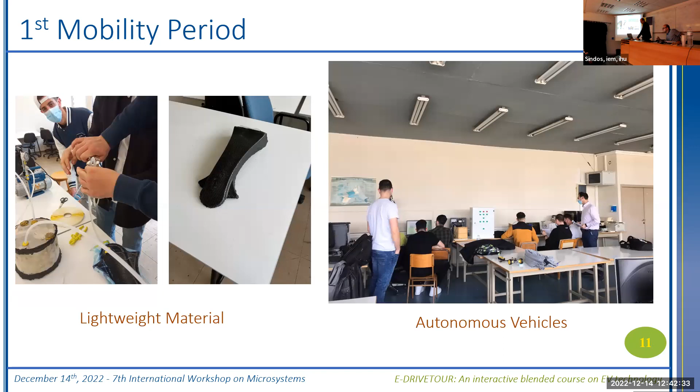Also, a few things about Greek language and culture, which was practiced in the city of Thessaloniki appropriately. Finally, during the last day, we had a real electric vehicle coming from the Center of Research and Technology in Greece, which the students investigated, served every part of it, and we had the last picture of the first mobility period. In the second mobility period, things were more or less the same.

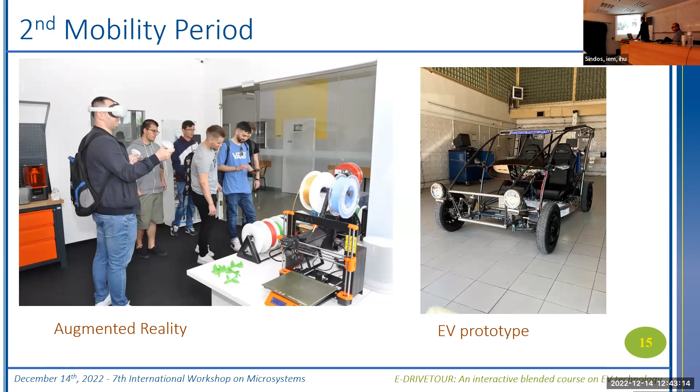We had the augmented reality lab. The students worked with an electric vehicle prototype, did their onboard diagnostics on a Toyota Yaris hybrid, and some cultural activities, which was part of the pleasure that always accompanies this mobility period.

During the third mobility period, the students were divided into 4 groups. One group came here to Thessaloniki to work with Interlink, the CERTH, and the International Hellenic University. Another group moved to EASY in Poland. A third group to E-PROIN in Salerno, Italy. And finally, a group of students to TRIGO, a group producing electric vehicle prototypes in Poland.

After all these procedures, we had the certification exams. They are divided into 3 parts. Each of these parts examines the knowledge of specific topics from the overall curriculum, and the final certification will be provided by ECQA, which is a certification provider company from Austria.

In the frame of the project, various materials have been produced, like website, social media, the e-learning platform, some technical publications, participation in forums, events, workshops like this one, and promotional material.

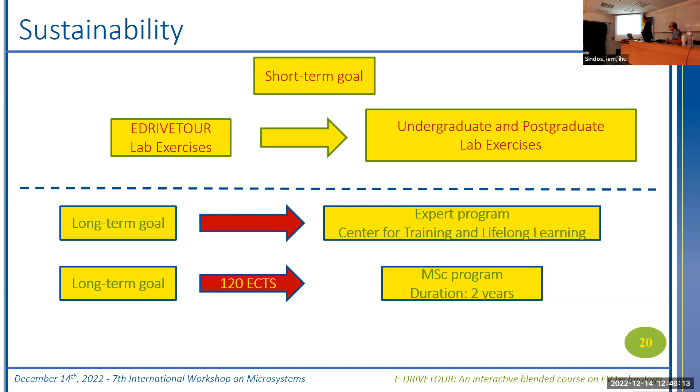That's all. Thank you very much.

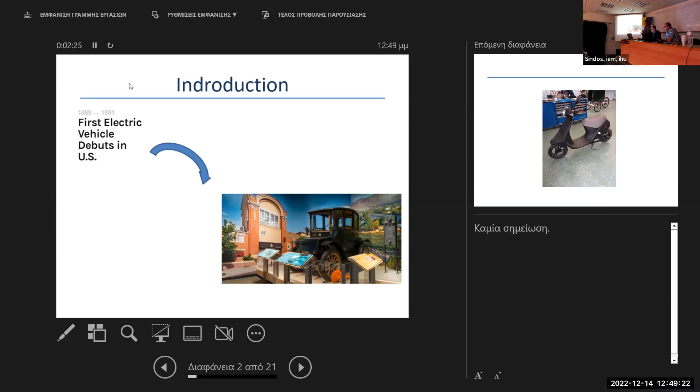didn't stay behind exactly in terms of electrification as an appliance. The electrical evolutions never stopped growing, and many times inventions helped assist the internal combustion engine cars, like the electric starter, which is the starter of the motor of the engine. Furthermore, heavy-duty machinery was developed and widely used in industry, like forklifts in logistics, various motors, appliances for power transportation and storage, and many small and big inductive motors for domestic use, like tools, screwdrivers, and many other tools.

So my point is that electrification as an appliance never stopped. And turning back to our time, the last decade, we're facing an intensive climate change. The political system promotes and secures legitimate funding for the electrical solution, and that is a very happy occasion. Even more happy is the fact that we didn't start from scratch to invent an electric car.

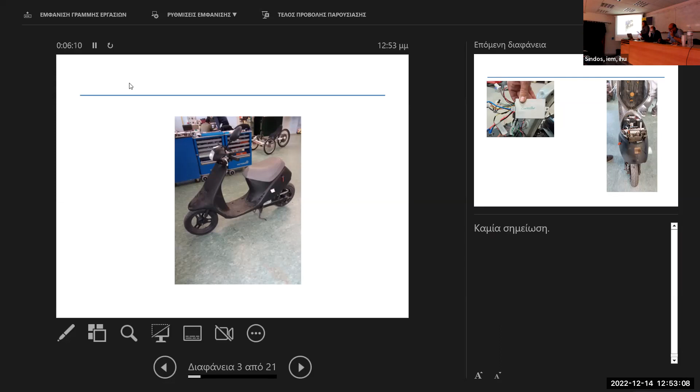In the first intermediate project, my group had to electrify a 50cc scooter, which is the one in the picture. The steps we took were to take apart every component of the scooter, to find out what we had, and then to see what we were missing in order to complete the necessary components for the powertrain.

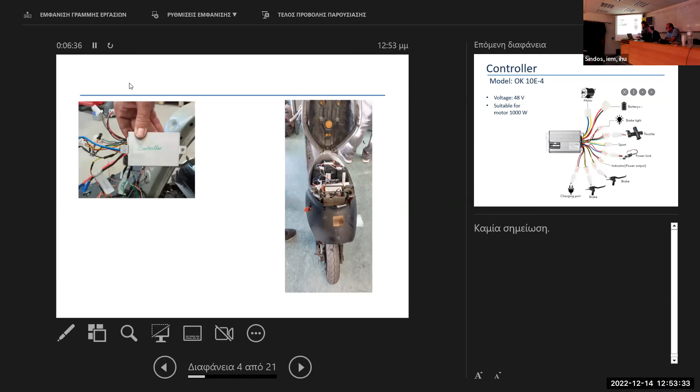So we found the controller and the motor, and we put labels on each component. We took enough pictures in order to help us reassemble the powertrain afterwards.

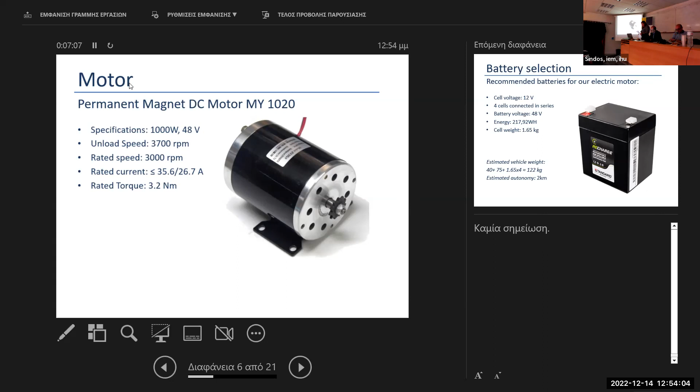We didn't have the battery, so we ordered the battery. We used the data from the components we had in order to order the appropriate battery to cooperate with the rest of the components.

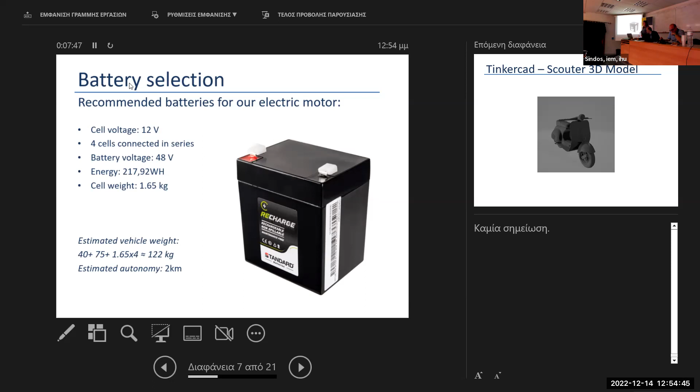When we completed the reassembly of the powertrain, it was time to design some applications that make the use of the scooter friendly and fancy for the user. First, we designed a 3D model of a similar bike, shown in the Tinkercad platform, which is an open source platform for various applications.

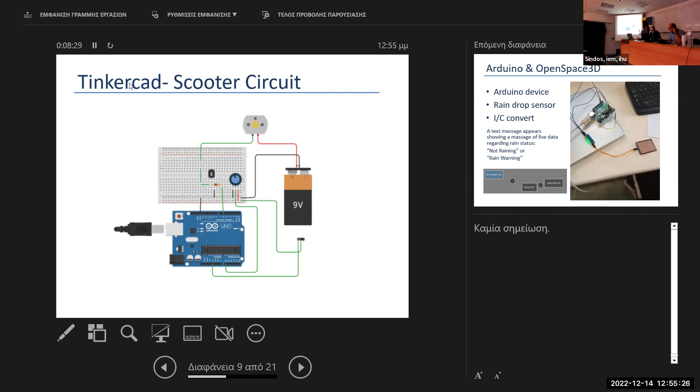We also designed the electrical circuit of the bike, and there you can see a rain sensor using an Arduino board. The rain sensor was a necessity for the bike because it's common among electric vehicles, and it's very useful to have one, especially when you have a scooter or a bike.

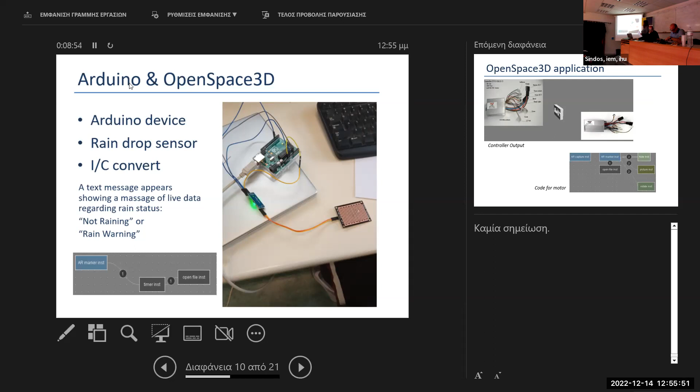So the next step was to develop an application where the user would be informed with live data from the sensor via the internet. That was actually finished, but we couldn't build the full application into the scooter because we ran out of time.

The second interaction with the user came with a QR code through the OpenSpace 3D application. OpenSpace 3D is an augmented reality platform environment that lets you build an application for mobile phones. You put a QR code on the bike, and the code is readable from your application, and some content pops up in 3D dimensions. That's very attractive and amazing at the same time.

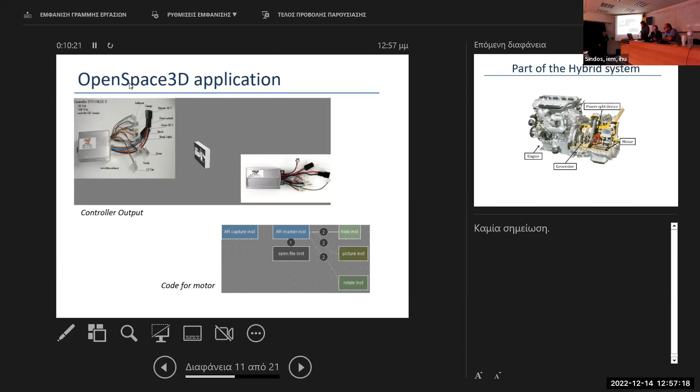That was the first intermediate project for my group. In the second mobility period, we had to present a hybrid model of a Toyota Prius 2004.

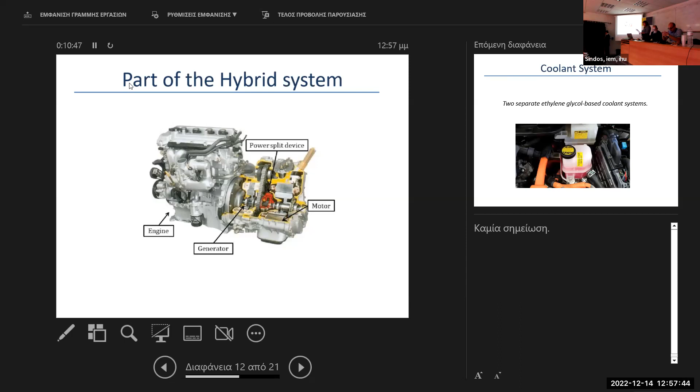The Toyota Prius has two power sources and two coolant systems. The first coolant system is placed on the engine, and the second in the inverter unit. We have two coolant systems because the engine and the inverter unit operate at different temperatures.

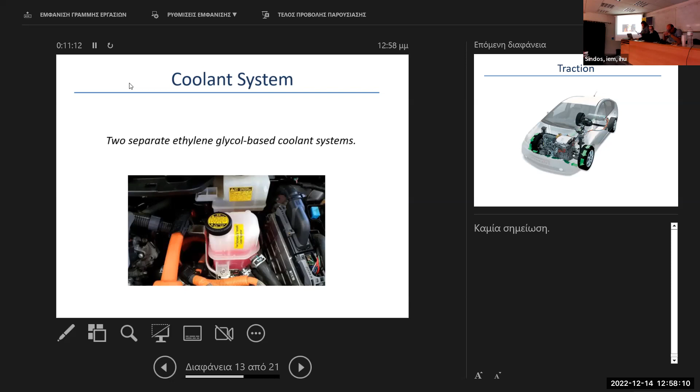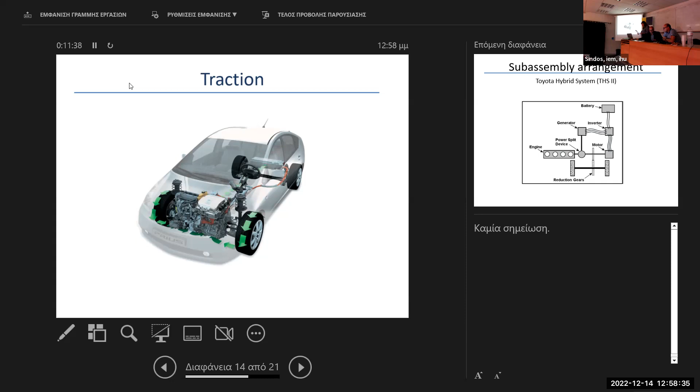The two motive power sources are the petrol internal combustion engine and the electric drive system. The operation of the two alternates in a smooth and continuous way, which is the cutting edge of this model. The internal combustion engine is a four-stroke engine based on the Atkinson cycle, designed to provide great efficiency and economy. Its peak output can reach 57 kilowatts at 5,000 RPM.

On the other hand, the electric drive system consists of a power source, which is a 200-volt battery, an inverter unit with multiple functions, and the motor. The combination of the two motive power sources results in fuel efficiency and lower emissions compared to traditional automobiles, because both power sources contribute traction force to the wheels. The motor is a synchronous 8-pole AC permanent magnet motor with peak output power of 50 kilowatts at 1,500 RPM, and maximum operation voltage of 500 volts.

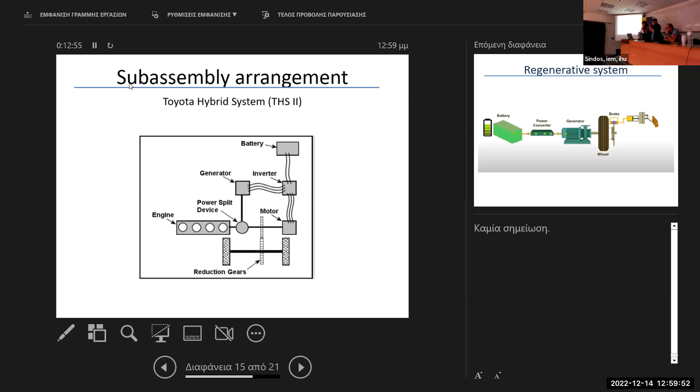The motor is mainly powered by the battery, so there is a need for a bidirectional buck and boost DC converter, located in the inverter unit, that boosts the voltage from 200 to 500 volts. Then a DC-AC converter provides three-phase voltage to the motor. The buck function of this converter is used while charging the battery from the generator, which is powered by the engine, or while decelerating and braking through the regenerative system of the car.

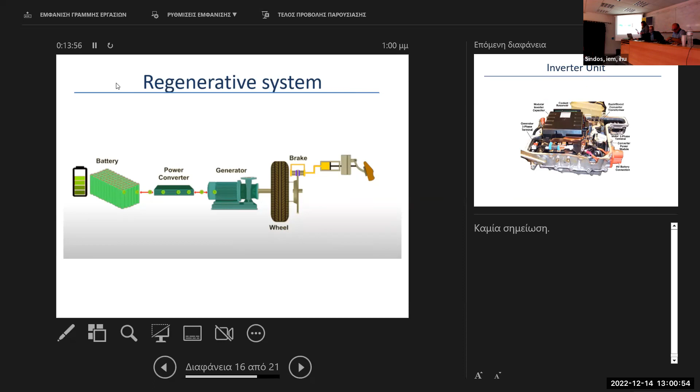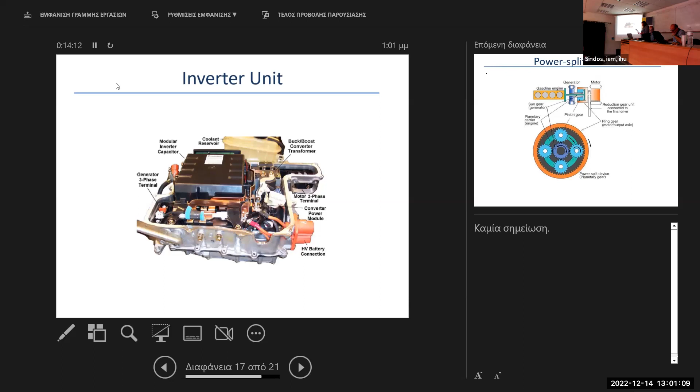The generator is an 8-pole permanent magnet AC device that functions as the engine starter. It produces high power density, making it capable of charging the battery while also supplementing the motor's power needs at the same time. The major transmission device of the model is the split device, which splits mechanical power from the engine shaft, rotating the generator and the wheels simultaneously. The split device is practically a planetary gear set, as shown in the picture.

More detailed information is written in the article itself. What is important to remember is that in this hybrid model, the motor supplements the engine when its efficiency is low and generates electricity when the engine's efficiency is high. In this way, the system achieves the best overall efficiency.

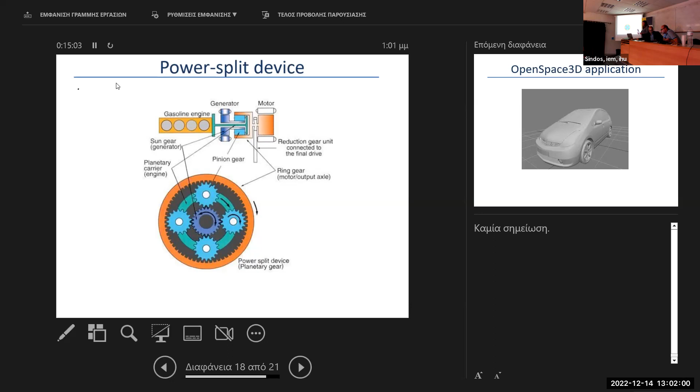To complete that thought, I would like to show you a short video with the power allocation. This is the augmented reality visualization of the hybrid model.

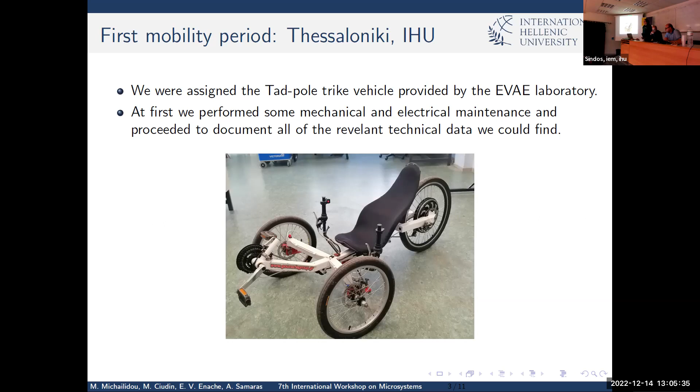We were assigned the Tad-pole trike vehicle by the Electric Vehicle and Automotive Electronics Laboratory. At first, we performed basic mechanical and electrical maintenance, and proceeded to write the necessary documentation of all the relevant technical data we could find on the vehicle.

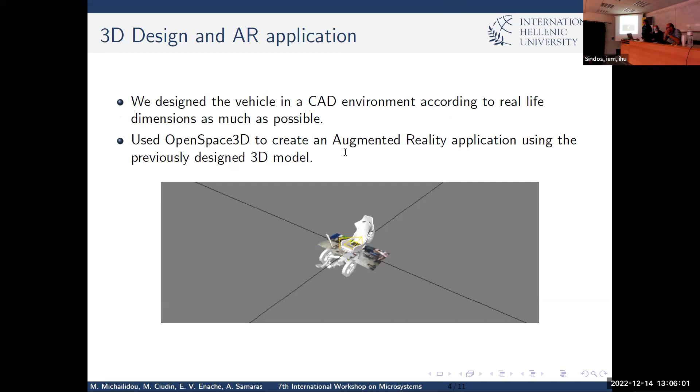Then we actually went ahead and 3D designed the vehicle in a CAD environment according to real-life dimensions as much as possible. And then we used that 3D model, which you can see in the picture, in the OpenSpace 3D program to create an augmented reality application.

Unfortunately, we had some issues with our electrical maintenance, so we had to create a circuit with a potentiometer and the Arduino microcontroller to simulate the throttle pedal of the vehicle. After establishing the connection between the circuit and the augmented reality application, if someone changed the potentiometer value physically, the throttle value you can see here would change in real time.

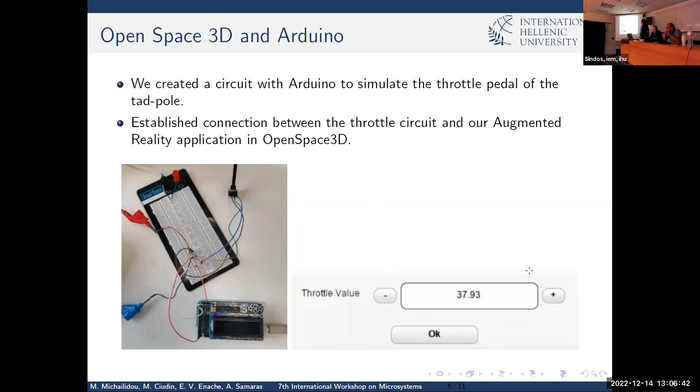One of the experiments we did was on regenerative braking and how that is done on the hybrid vehicle. We observed that whenever the brake was pressed severely, the battery recharged about 1 to 2% of the overall state of charge. Also, after reaching a certain value of regenerative braking torque, the rest of the braking energy produced is absorbed by the brake pads.

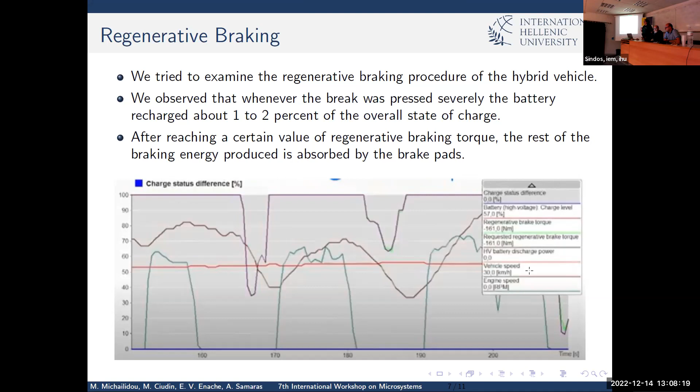So if someone wanted to come to a full stop while going at 30 kilometers per hour, the electric motor couldn't just brake by itself, but it needed the help of the brake pads to come to a full stop.

We then went ahead and had another set of measurements for the electric vehicle mode only of the hybrid. This mode deactivates the internal combustion engine of the vehicle and moves the vehicle strictly using the electric motor, which is powered by the battery.

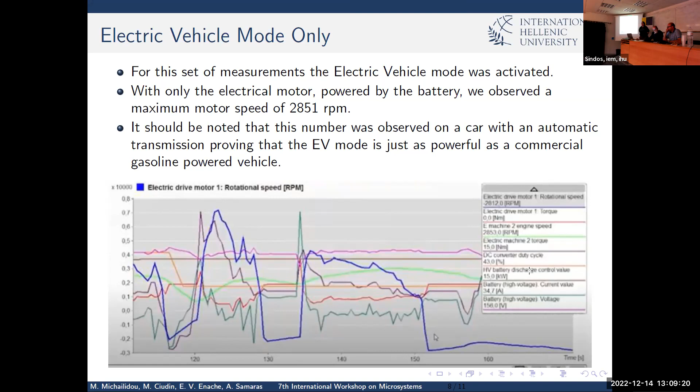A really nice value is actually the maximum motor speed we were able to reach, at 2,800 RPM, on an automatic transmission, proving that the electric vehicle mode only is just as powerful as a commercial gasoline-powered vehicle when it comes to speed, because you can see here that there was no torque output on this set of measurements.

So we went ahead and designed the battery in 3D. You can see the common 12 volt battery for all the low voltage devices that most conventional vehicles have, and the hybrid battery, which is comprised of nickel metal hydride batteries connected in series, totaling 144 volts and weighing about 31 kilos.

Here I briefly explain that the hybrid battery is charged from one of the motors, while it provides power back to a second motor and the inverter and the compressor of the vehicle, which is needed for its cooling.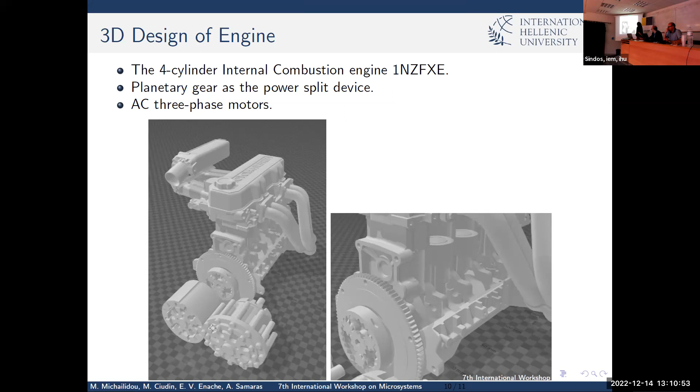Actually, this is all. And the planetary gear is here. There are a lot of people who know about vehicles in the crowd, so I'm not worried. Thank you for your attention, and I would love to hear any questions that you might have.

What is the capacity of the hybrid battery? I'll have to check the manual, I have to be honest. It is about 10 amp hours, 10 kilo amp hours, somewhere.

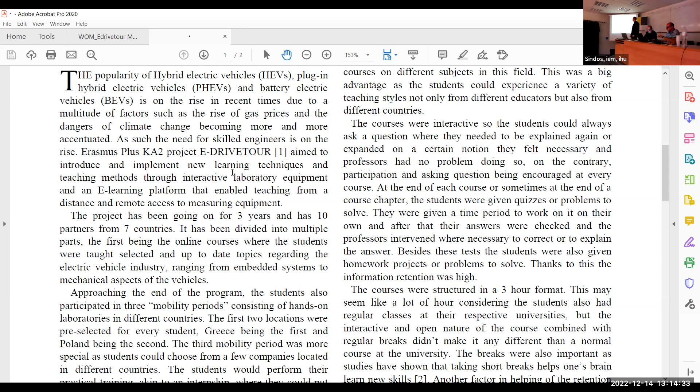As said before, the project has been going on for 3 years, and the last year was when the actual teaching happened. We had the first part with online courses, and after that the second part with mobility periods, two of which were hands-on laboratory practice. The last part, the third mobility, was special because students could pick which company to go to and do work in that startup to see how people work in a professional environment where they produce something.

The courses were structured in a 3-hour format. We had breaks, and if we had questions we would interact with the teachers. At the end we had little quizzes and problems to solve. It was very interactive, and we could solidify the information presented to us very easily because of that.

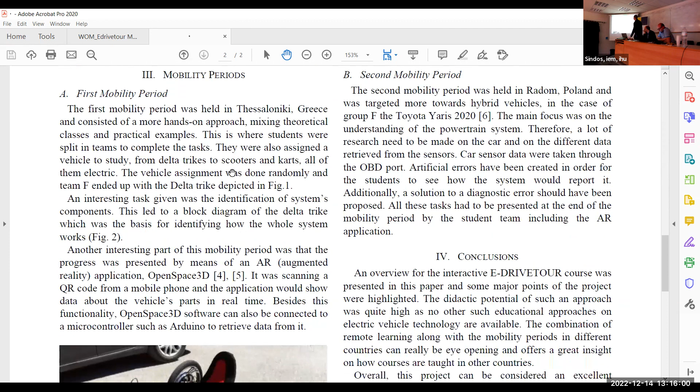Just to present each mobility period and what we did. The first mobility period was here in Greece, in Thessaloniki. I liked it a lot because we got to work with a number of electric vehicles. We even had a mini race at the end where students could compete with electric vehicles they worked on. We learned a lot of things.

We even had simulated errors introduced, like a defect cell in the battery, and we were supposed to find it and figure out the problem. We also had a problem in one of the wheels and had to fix it. It was very interactive and nice. At the end we did something I hadn't done before, and my team hadn't either - a presentation in OpenSpace3D, where we had to make a model of the vehicle and present it in a new way with augmented reality.

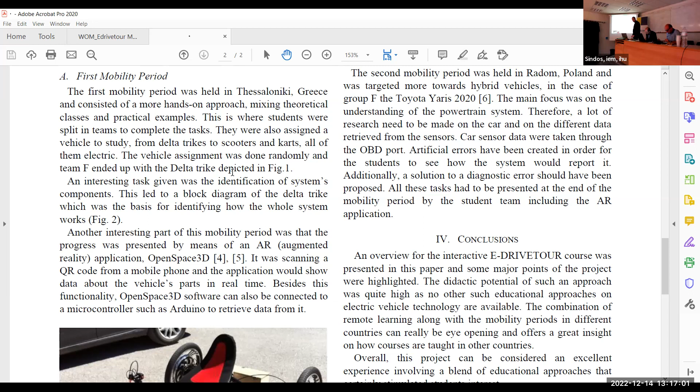The second mobility period was in Radom, Poland, and we focused more on hybrid vehicles, specifically for us the Toyota Yaris. We did different measurements of the sensors, and some artificial errors were created for the students in order to see how they are diagnosed and how they are fixed.

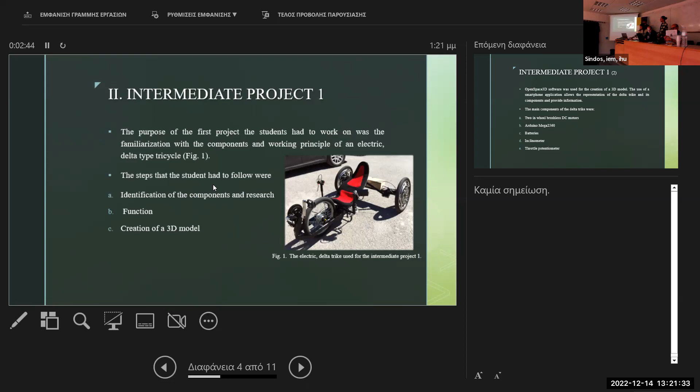The creation of the 3D model was made in OpenSpace3D, and we also used a mobile application to make a representation of some components of the Delta trike bike and provide information about it.

The main components of the Delta trike bike were 2 in-wheel motors, the brushless DC motors, 1 Arduino Mega2560, 2 batteries, 1 inclinometer, and 1 throttle potentiometer.

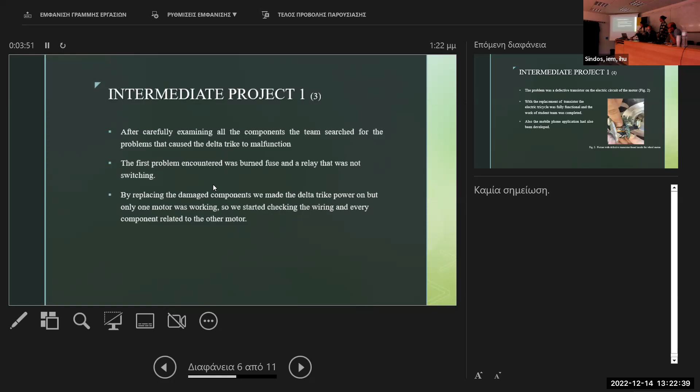We checked the wires and the motor, and found there was a defective transistor in the system. We replaced it, and after this the trike bike was able to work appropriately again.

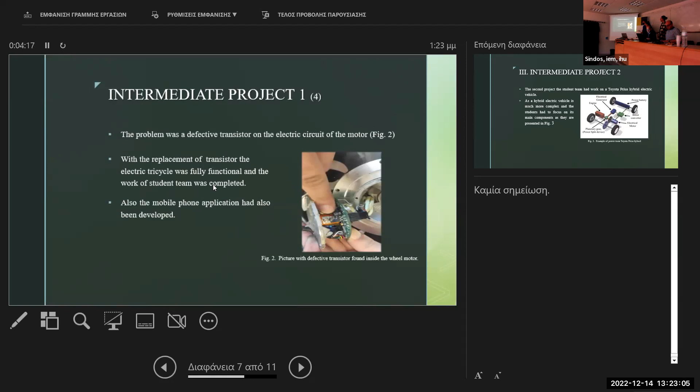And finally, we made an application in order to solve it.

On the second intermediate project, we worked on a Toyota Prius hybrid vehicle. As a hybrid vehicle it was much more complex, so we had to search and find information about its components. As you can see in figure 3, the components were a planetary gear, internal combustion engine, electrical generator, boost converter, electrical motor, and the battery.

After we found the information, we worked with OpenSpace3D software to create 3D models of the vehicle and all its components. For this 3D model, we used push buttons to select and see information and some papers about the 3D model of the vehicle and every component.

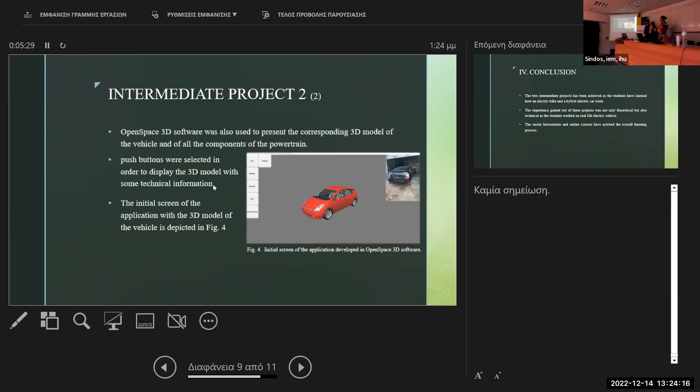Also, as you see in figure 4, this is the initial screen, and you can see the 3D model of the car and the push button.

The objective of the 2 intermediate projects has been achieved, as the students have learned how an electric trike and hybrid electric car work in general, as well as the operation of individual electric vehicle components. The experience gained from these projects was not only theoretical but also technical, as students had the opportunity to work on real-life electric vehicles, disassembling and measuring various parts of the electric vehicles used.

The on-site laboratories and online courses done prior to or during the time frame of the projects significantly assisted the overall learning process. We have to thank all of the professors and students for the effort they took to bring this program to completion. Thank you very much, and thank you for your attention.

Any questions? Thank you very much. Thank you.

We have to say that the overall session is not research-focused. It doesn't have to do with research, but it's mostly educational, strictly educational, on an up-to-date scientific area like electric vehicles.